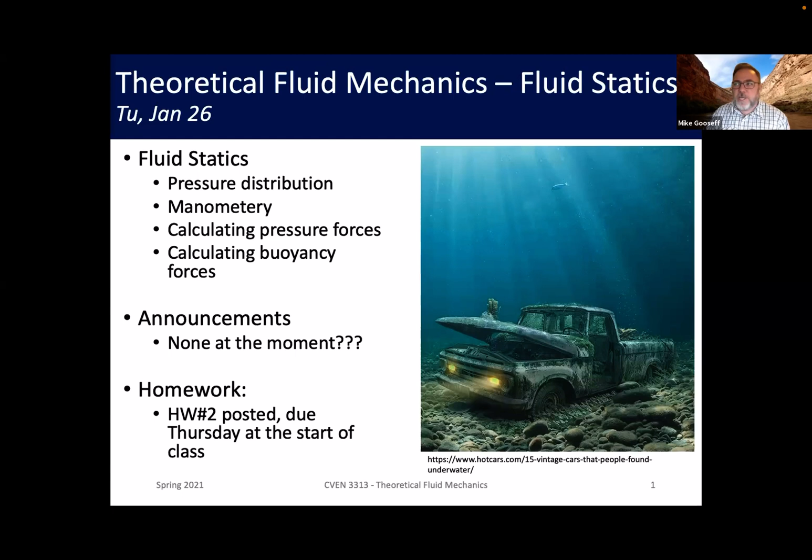So today is the 26th. We will keep talking about this for the next 2 weeks. Today and Thursday we will go through pressure distribution, and by next Tuesday we'll start talking about manometry. Next Monday's recitation will focus on problems related to the topics we go over this week. One little challenge with recitation is that we want to go over problems from concepts we've already covered.

Which hopefully makes sense to you all. We're not trying to cover new ground.

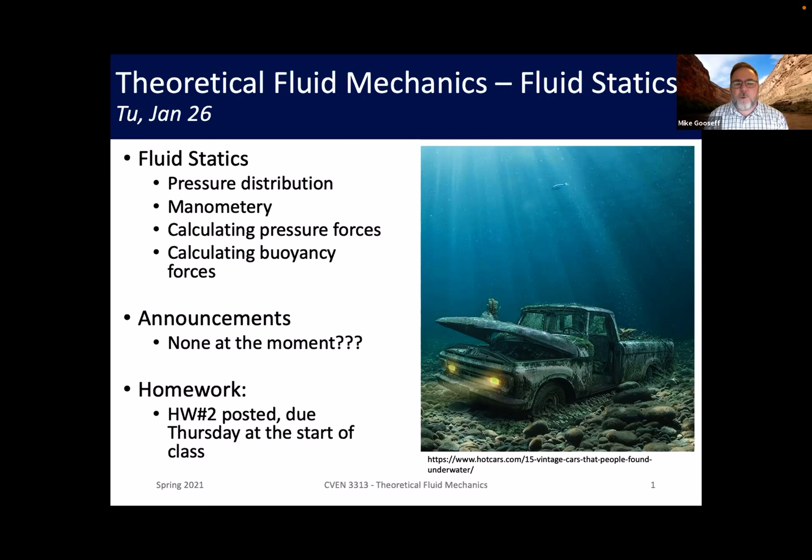Eventually we'll move towards calculating pressure forces and calculating buoyancy forces, and talking about stability, buoyancy and stability. At the moment I don't think there are any announcements, with the exception of the iClicker thing I just talked about. And as a reminder, homework 2 is posted, due Thursday at the start of class.

For specific weight, there's like professional or standard ways to write your dimensions. So for instance, for specific weight, you can't write kilonewtons per liter or per milliliter - that's not the professional or standard way to do it. It needs to be per meter cubed. Hopefully that made sense.

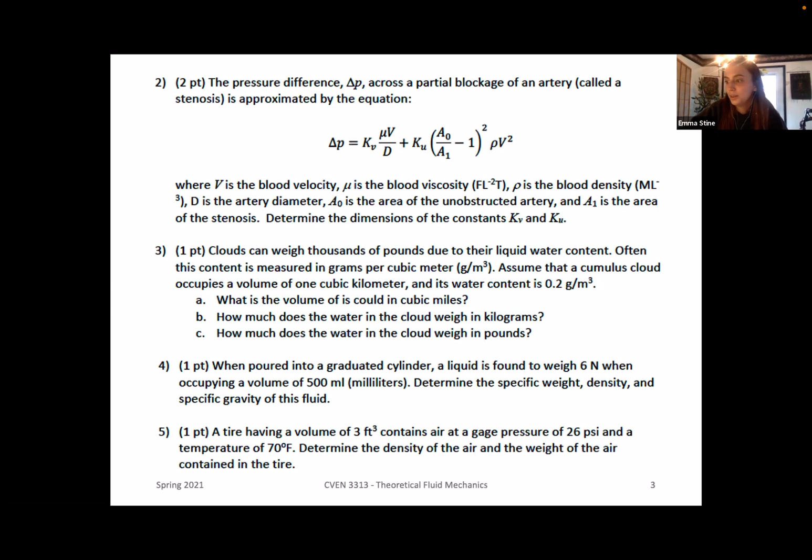One extra thing, a couple people made this mistake, is putting units for specific gravity. Make sure to remember that specific gravity is unitless. It's just relating the properties of a certain fluid to water. So make sure that you don't put units for that.

To continue on for number 5, we had a few people on number 5. In problem number 5, it gives you the gauge pressure, but you also need to add the atmospheric pressure to get the absolute pressure for this problem. So don't forget to add the 14.7 pounds per inches squared, because in this equation you want the absolute pressure and not just the gauge pressure. Related to that, that equation was in the notes - those equations are in the notes.

Related to that, when the problem gives either imperial or metric units, make sure to put the answers in that same unit. We had some people putting the weight in newtons. That's not technically wrong, but you want to keep it in the same units, because we didn't know how much the force was in newtons. You want to keep it in pounds if the problem was given in imperial.

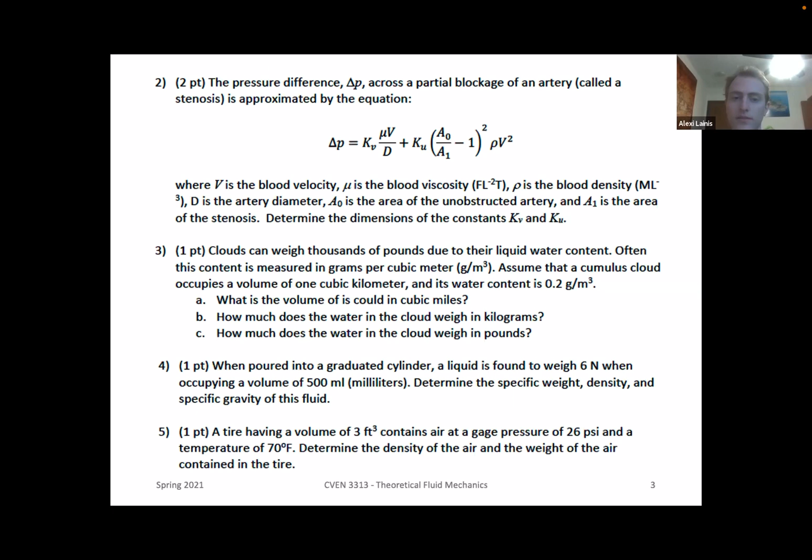The last two problems you guys did super good, and these ones were hard, but you did really well. So just make sure that you have a free body diagram for problems like these.

We didn't take points off this time because you didn't know, and most people were super neat, but maybe just try to make sure we can read it. Is there anything else, Alexi? Yeah, I think in general, for homeworks going forward, definitely watch significant figures. If you get a number with 6 decimals, don't put all 6 decimals. There's no way you know that to that certainty.

So you don't want to put that in artificially, saying you know something to that much certainty. And then also just generally be careful with units. Try to write out units at every single step of the problem. That way it'll stop you from getting errors, and make sure you don't mess up some conversion.

I don't think I have anything else on that. I'm just making a note. I wanted to add a link to the significant figures overview that I forgot to yesterday. I think I said I would during recitation, and I didn't do that.

A few questions have come through the chat. I guess a few of those would direct to me, so I've replied to those. But one other question - Elizabeth, yesterday at the end of recitation, I can't remember if I captured it in the recording or not, but she asked a question about where to find for problem 3 on homework 2, part 3. That's one of the PDF sort of problems, not the online problems.

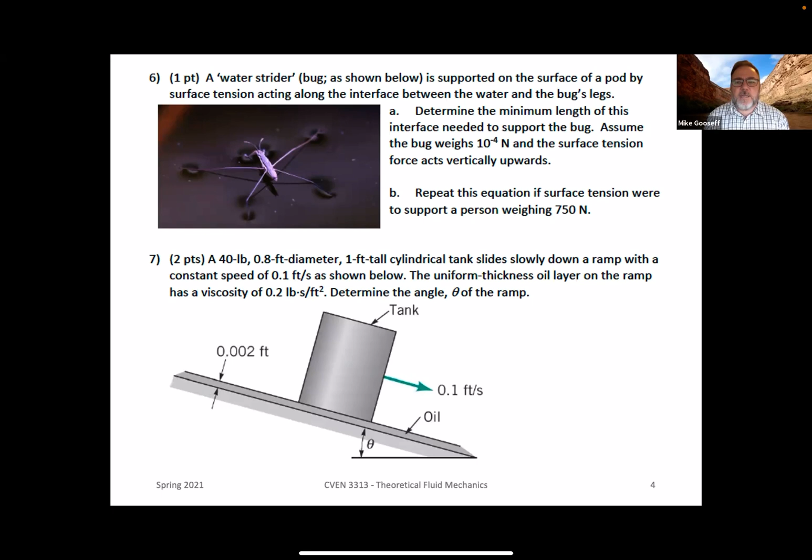Just real quick - for a couple of the questions on that first homework, I didn't do sig figs because the question was given with a single figure, and I figured that was a pretty significant error. Do you want us to be rigid on that?

Yeah, from going forward, you'll need to use significant figures. So I'll provide a link in Canvas to the material we have in the electronic book, or you can go find it yourself. It's one of the appendices essentially, but it's a pretty nice overview to remind you what happens with significant figures when you have 1, 2, or 3 in different numbers, and then you add, multiply, divide, whatever you do to them. How do you move forward with those? So thanks, Julie, that's reasonable up to this point, and going forward we'll try to enforce this a bit more and get you guys used to using those.

Just quickly remember that when you go through the problem, don't round as you go. Once you get the final answer, you can write out that answer with lots more digits, and then write it again with the correct number of significant figures.

As a reminder, we're not posting solutions right after we grade. We're going to post the solutions to all the homeworks the Friday before each exam, from the last batch of homeworks. The reason we're doing that is in case anybody gets sick and needs to turn in something late, it gives us the opportunity to not have the solutions out there so they can complete the assignment. So it's just a little bit of a way of providing some buffer for us.

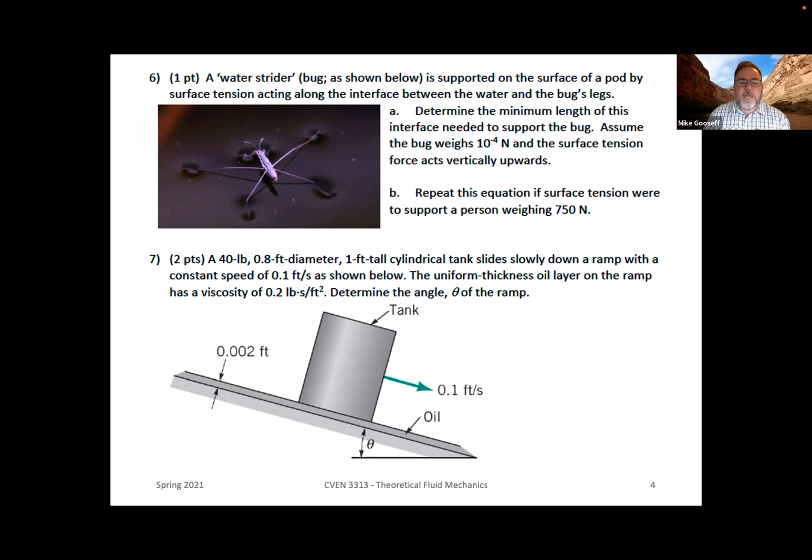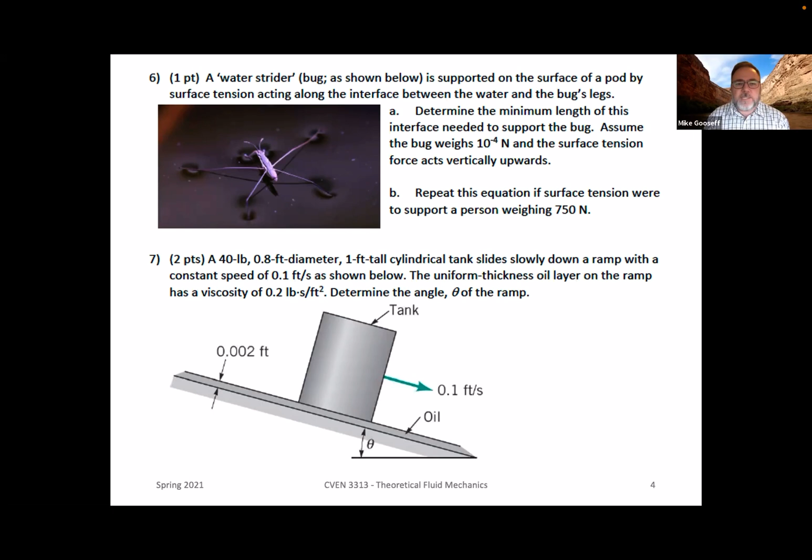So you will see those, we will post those - it just won't happen until a couple of weeks here. You'll have them in plenty of time to study for the exam, but we wanted to provide this in case we have to deal with different folks getting sick through the semester. Thanks, Emma and Alexi, appreciate that. I don't know that we'll do this for every homework, but part of our point here was just to make sure we're all developing good habits as we work through our homeworks for the rest of the semester.

Right, so we're moving into a new unit here, a new module. I've got a lot of underwater images here, because when we go underwater, we may or may not feel it if we're just in a swimming pool, but if you are a scuba diver, you will start to experience pressures at depth that are the consequence of overlying water.

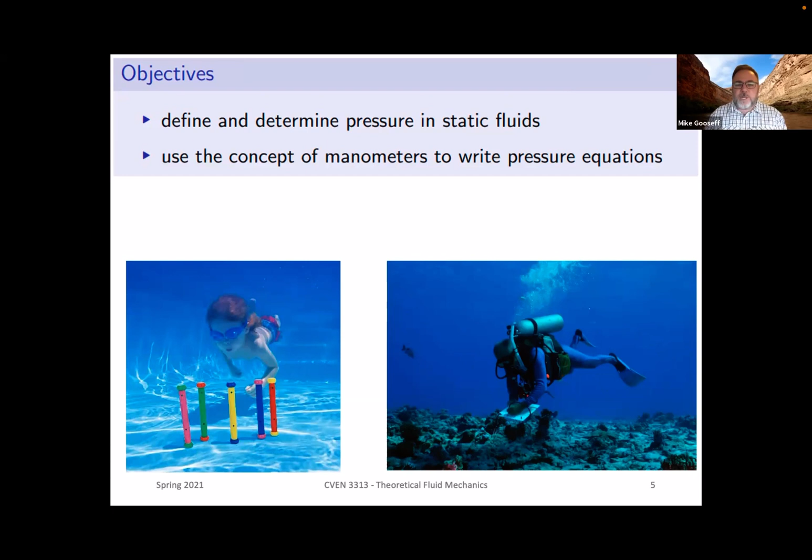Our objectives here are to define and determine pressure in static fluids and pressure distributions. We're going to use the concept of manometers to write pressure equations so we can work through complicated systems to figure out how pressures vary. Manometers are simple ways of reading pressures in pressurized systems, and we'll talk about how to make use of those. We will start to calculate pressure forces on submerged surfaces, and over the next 2 weeks or so, we'll also calculate buoyancy forces and discuss stability.

So what happens when we are or are not stable? That's really for something in particular that is partially submerged, so we think about a barge, a boat, a ship, things like that, so we can calculate the stability criteria.

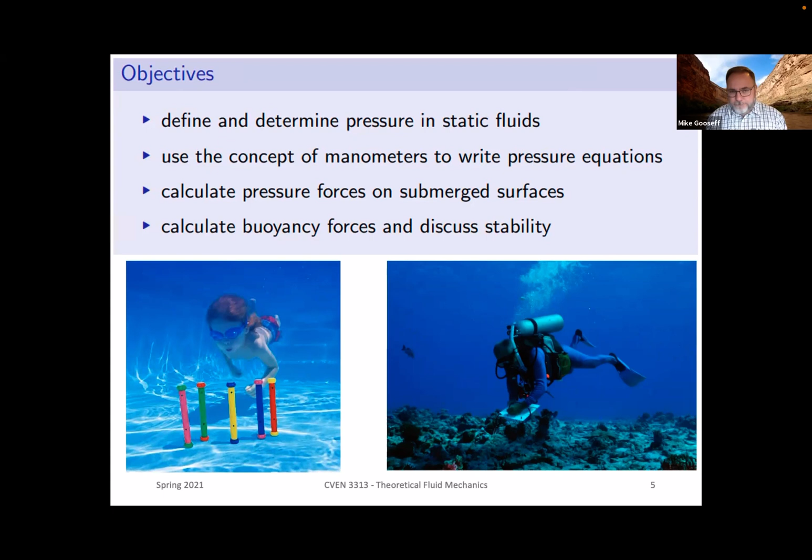As we see from these two pictures here, there are lots of complex shapes that occur underwater, right? We're going to start with very simple geometries to derive our equations or relationships, but recognize that these apply even to complex shapes, like a human with a tank on their back and flippers and so forth. Whatever we can submerge, we should be able to calculate a pressure distribution on, if we can put it in a fluid, and in large part, I'm thinking carefully about the context of underwater.

And this, I thought, was just a good example of that, a place where we have a fairly horizontal bottom to this, and then this really nice drop off here with this ledge.

So pressure is a normal force per unit area at a point in a fluid, okay? You may be used to hearing things like when we've talked about the ideal gas law, or if you've had to put air in your tire, you say PSI all the time, but ultimately PSI stands for pounds per square inch. The square inch is an area and pounds is the force. In SI units, that might be pascals, newtons per square meter. Those are the typical unit combinations that we have for pressures. So a pressure should always be a force per unit area at a particular point in the fluid.

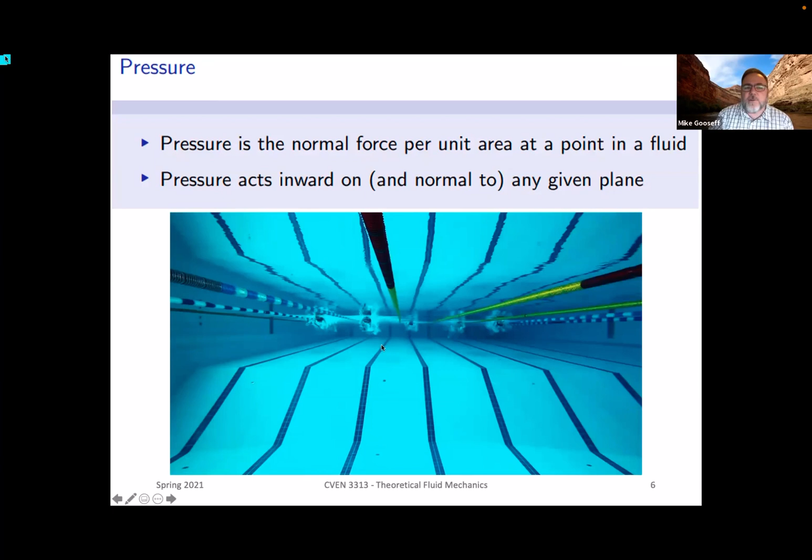Pressure acts inward on and normal to any given plane, which means we have pressure acting on every location, every square millimeter of the bottom of this pool, which probably doesn't surprise you. What we will eventually talk about is how that pressure varies as you move to different places, either in the fluid column, in the water column, moving up and down. These swimmers are all swimming at the surface, but if you were to dive in, how the pressure variation changes as you go through different depths, and how it changes on the bottom of the pool based on the elevation you're at. In other words, it might be different in the shallow location than in the deep location on the bottom of this pool.

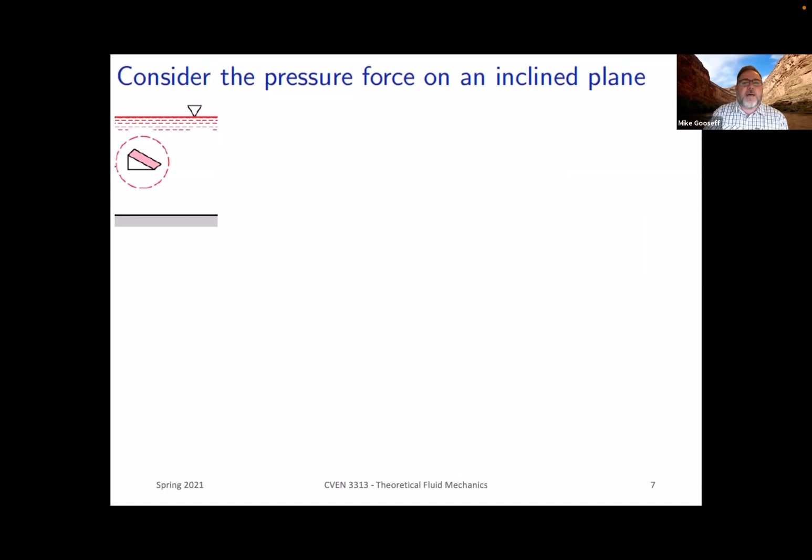Okay, so let's start with considering a pressure force on an inclined plane, and this is this inclined plane that we're showing on the left-hand side being submerged, okay, in, let's say, a pool or a lake for that matter. One thing I want to point out, if you're not familiar with this, this is our notation.

This upside down triangle is our notation to identify a free surface, meaning the surface of the liquid where it interacts with the gas overlying. In most cases, that's air, but you could have a closed system that might have some different gas than air above a liquid. But in any event, we're going to start with a very simple situation here with this wedge.

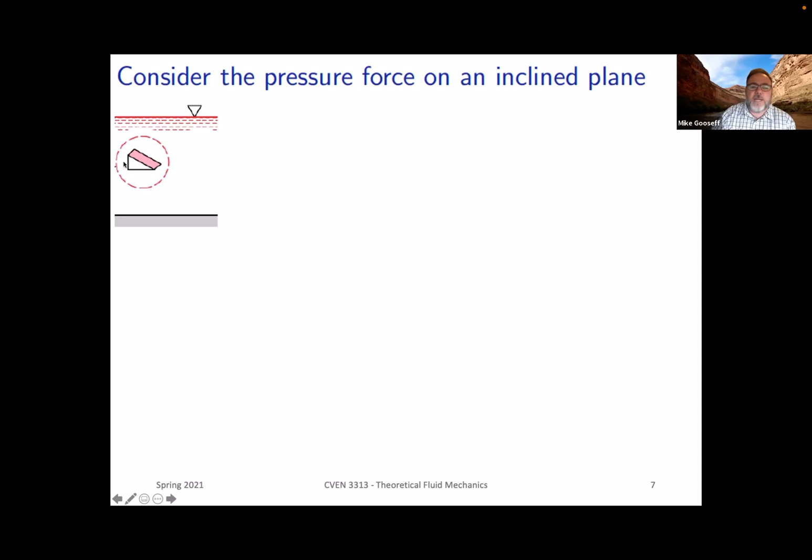All right, so let's zoom in on this wedge a little bit. This looks complex, but it's going to get more complicated. So let's talk our way through it, and then we'll start to talk about why we're using a wedge here.

So for starters, you can see that we've provided a Z direction, an X direction, and a Y direction. X and Y are kind of in the same horizontal plane, and Z is vertical. And so the bottom of this wedge is in the XY plane, and you can see that the top surface then is sloping from this Z location down to Z equals 0, essentially. So this is some length here, at Z equals 0. It has some X dimension to it, but not a Y here.

In general, we're just going to give some dimensions here. The height of the left-hand side of this wedge is delta Z, just using some generic notation here. The reason is that we can start to generate some simple formulas that allow us to look at how these things relate to each other. So the first is delta Z is the height of the wedge on the left-hand side, the tallest part. It has some length in the Y dimension, delta Y, going along this horizontal here. It has some width, we might say, delta X. And then it has this hypotenuse length here, the length of this ramp or hypotenuse of a triangle. This surface has some length, delta S.

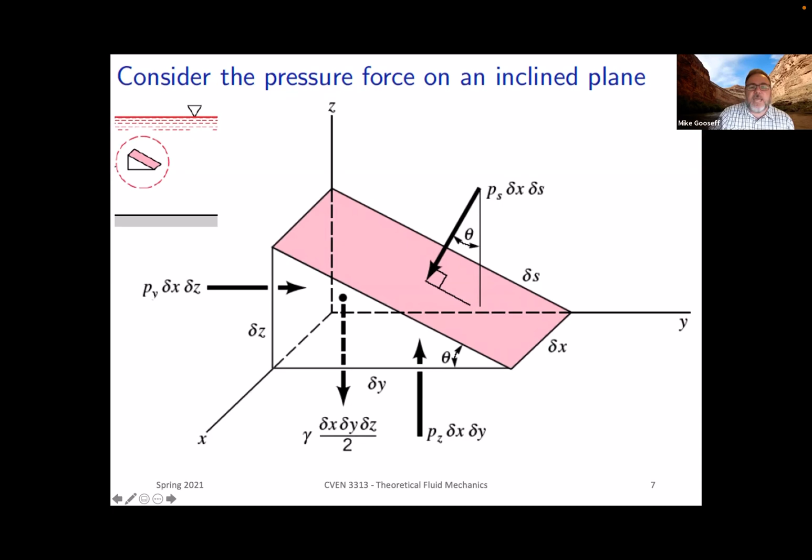Now we're going to do the same thing on these other forces. P sub Z is this vertical one coming up from the bottom, and it acts on the bottom, which has an area of delta Y times delta X. Delta X, delta Y is the area, multiplied by the pressure P sub Z gives us this force acting on the bottom. Then, skipping that one for a second, Py is acting on this left-hand side, Py times the area acting there.

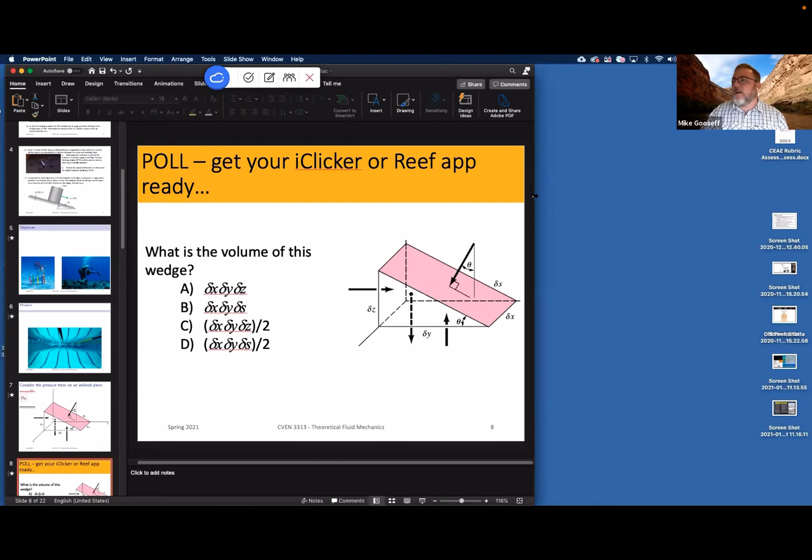The question I want you to wrestle with here is, what is the volume of the wedge? Is it A, delta X, delta Y, delta Z? Is it delta X, delta Y, delta S? Is it delta X, delta Y, delta Z divided by 2? Or is it D, delta X, delta Y, delta S divided by 2? Let me get going here, multiple choice, and we'll look at the results as they come in.

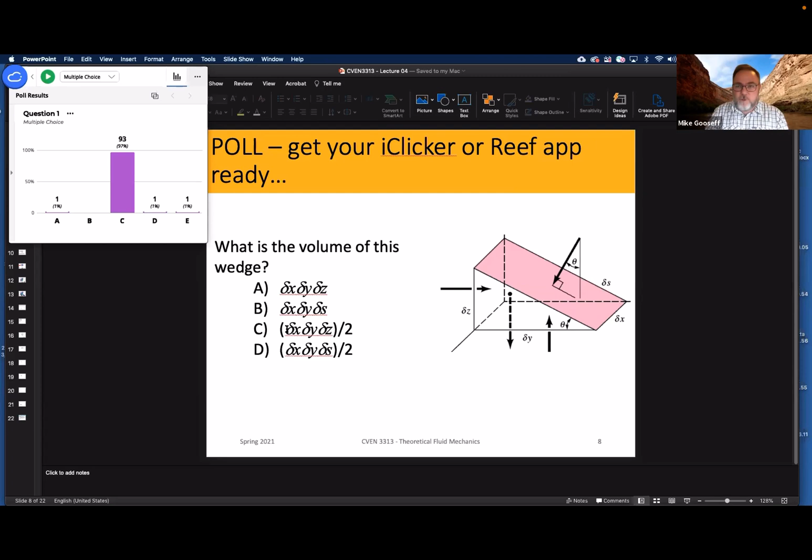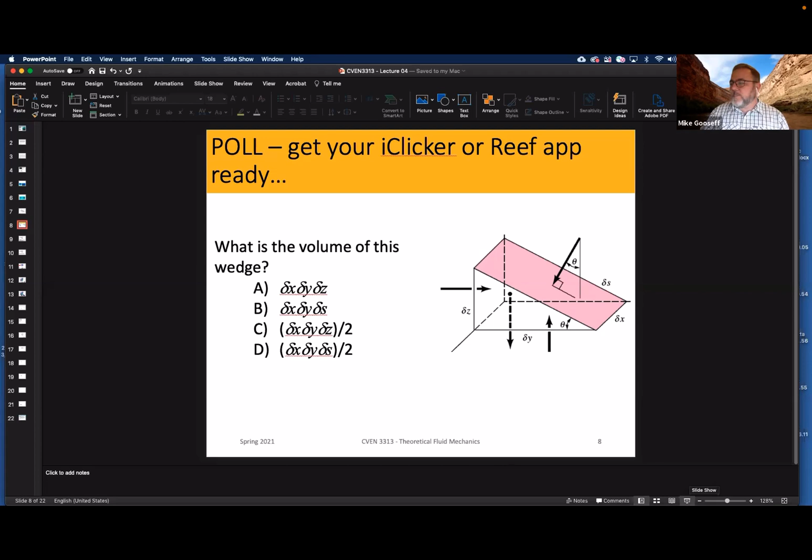The next thing we're going to do is work through the force balances acting from each of these pressures and the weight, and look at how they all balance each other to come up with a few fundamental pieces of information for us to use. When we do that, we will need the volume, so I'm not going back to recalculate it, we've got it here, which is part of the reason I wanted to do it this way. Let's move on.

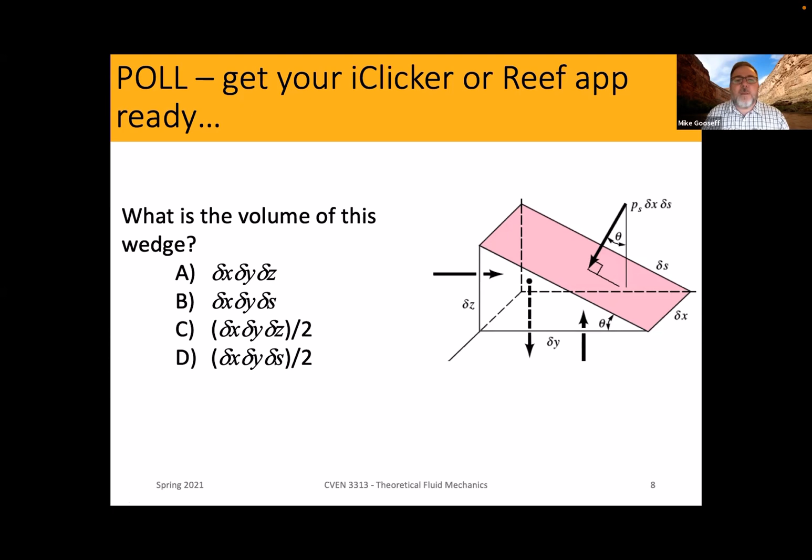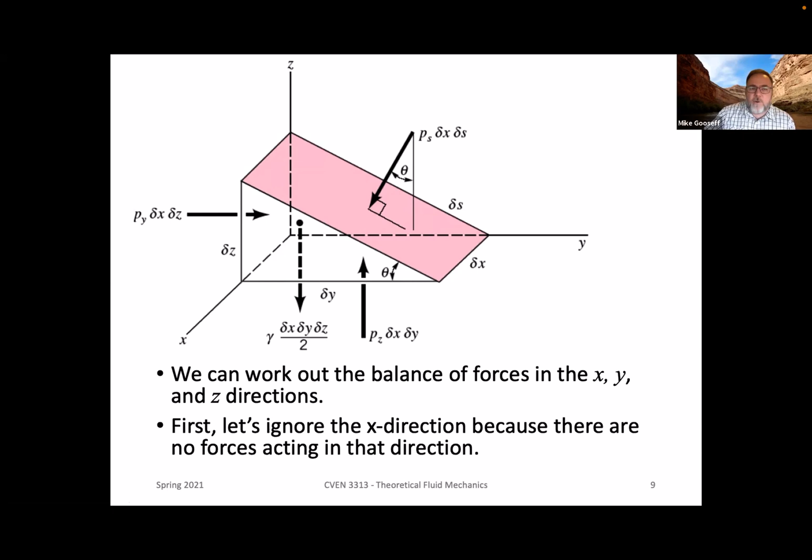And so this gives us the weight force acting in the vertical downward z direction. We can work out the force balances in the x, y, and z directions. First, let's ignore the x direction. We haven't drawn x pressures here, or the forces related to those pressures. The reason is that if I put one in meeting this location, and there was another one coming from the other side, they're both acting on exactly the same areas, so they would cancel each other out.

Part of the reason we're ignoring x is that in this case, because we have the exact same area in the yz plane for both sides of this wedge, those pressure forces are going to be equal, because they're at the same elevation and act on exactly the same areas, so they cancel each other out. So we're just going to work in the y and z directions for our force balance analysis.

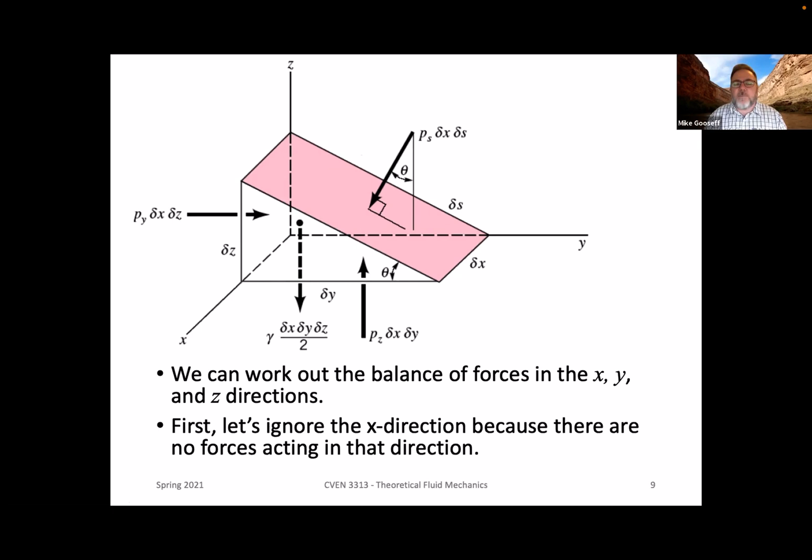Because the fluid is static, and the block is static as well, we expect that the sum of the forces in the y direction equals 0, and the sum of the forces in the z direction also equals 0. Note that, one of the things I didn't mention before, our angle for our inclined plane here has value theta.

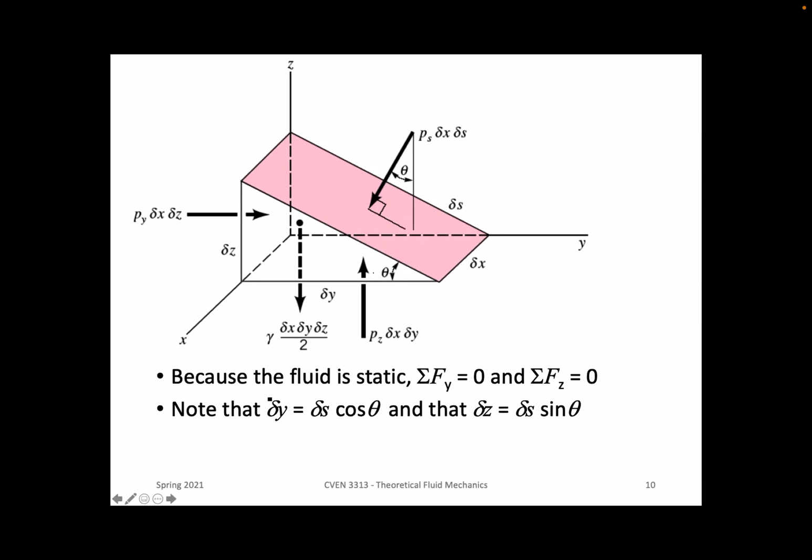So if we want to represent delta y, which is this length here, as a function of delta s, we can say delta s times the cosine of theta gives us delta y. Similarly, delta z over here is equal to delta s times the sine of theta. I'm providing that to you for the moment. We're going to use that in some substitutions in a moment, but I thought it would be easiest to provide those up front, so we can pull them into our analysis without having to diverge from the force part to deal with geometry.

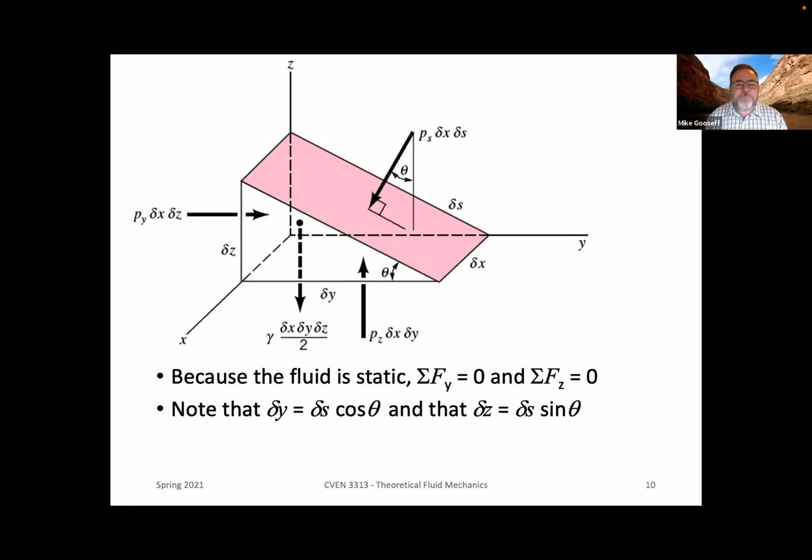All right, so let's start with the sum of the forces in the y direction. First, let's start with this thing acting in the positive y direction. We have a pressure force, Py, whatever that pressure is that's acting on that face, multiplied by the area of that face, delta z tall by delta x wide.

Then secondly, we have some y component of this force that's acting normal to the face of our wedge here. It's going to have both a z and a y component. So we've got some piece of that as well. It's not fair to say it's Ps times delta x delta s. We're going to have to add like a cosine or a sine to that, to just get the component we want.

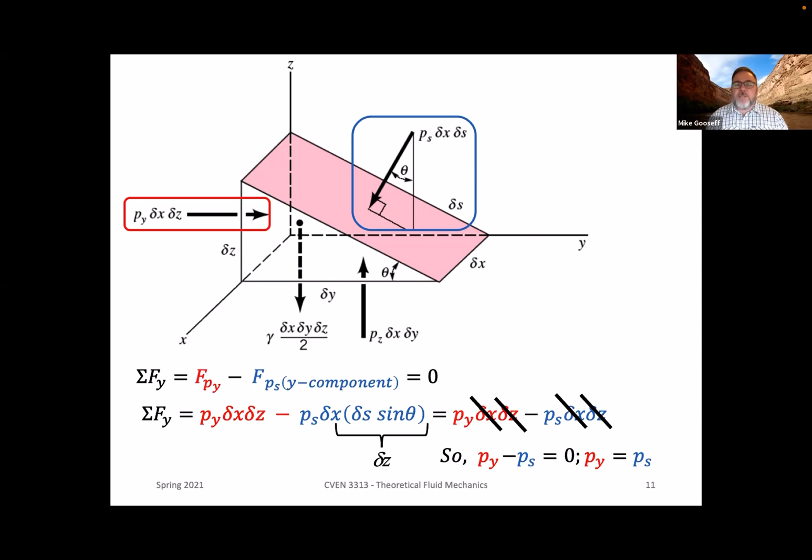Well, what will we learn if we do this in the Z direction as well? Let's go back to scratch here for a second and look at the sum of the forces in the Z, or vertical, direction.

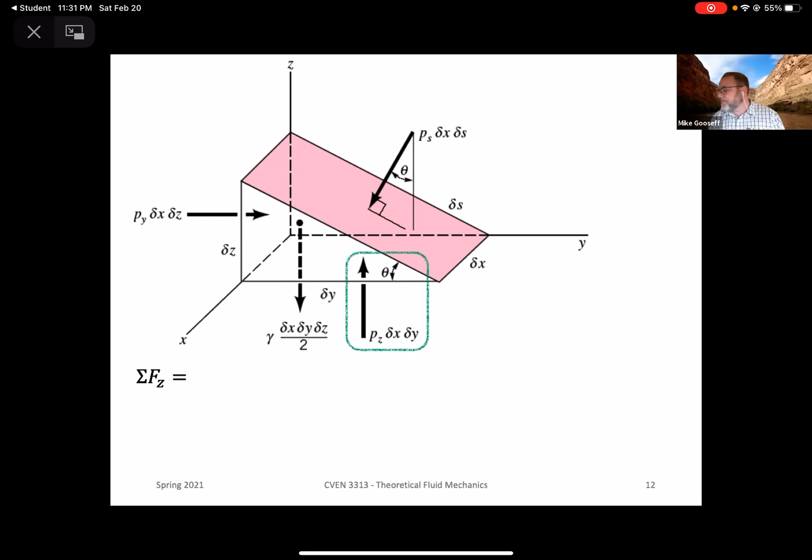We're going to start with our upward force acting on the bottom of the wedge here, and you can see that that is a force PZ times delta X delta Y. We're going to give that a green color. We're going to have the blue one again be our PS.

Right now, we just need the vertical component. Before we were using the horizontal, or the Y, component. Now we're going to look at the vertical, or Z, component of this force acting there. And then the last thing we have, I decided to use purple for this, so we didn't reuse red, but now we've got purple for the weight force.

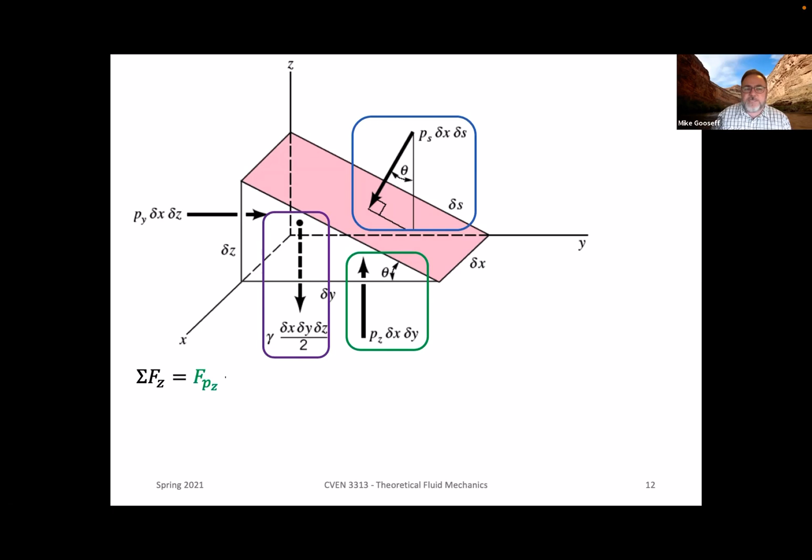So let's again set up our force balance equation with font colors that match these indications that I've provided. The sum of the force in the z direction will be equal to the force that comes from P sub z, the pressure P sub z acting on the bottom of our wedge. That's acting in the upward direction, so it's positive.

Then we have some negative component of the force related to this P sub s, right? So some z component would be negative. And then we have weight also acting in the negative direction, okay? So one up, two down, right? And somehow all of these have to balance for this sum of forces to be 0.

All right, so let's expand these out and write them down in terms of the pressures, right? That's where we found some utility when we were evaluating the sum of the forces in the y direction. Let's see if we can do it again here in the z direction, see if we learn something different. Spoiler alert, we will learn something different.

So P sub z times delta x times delta y is the force related to this pressure acting on the bottom of our wedge, okay? So there's that term, we shouldn't be too concerned about that, that should look familiar. And then the P sub s term component that we want is basically P sub s multiplied over this area, delta x times delta s. But now we multiply by cosine theta, so it is the cosine component that we want to give us the vertical component, right?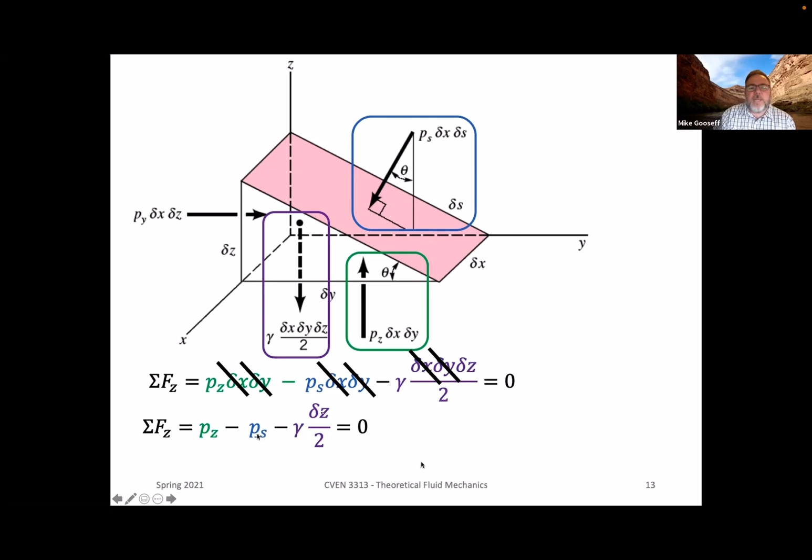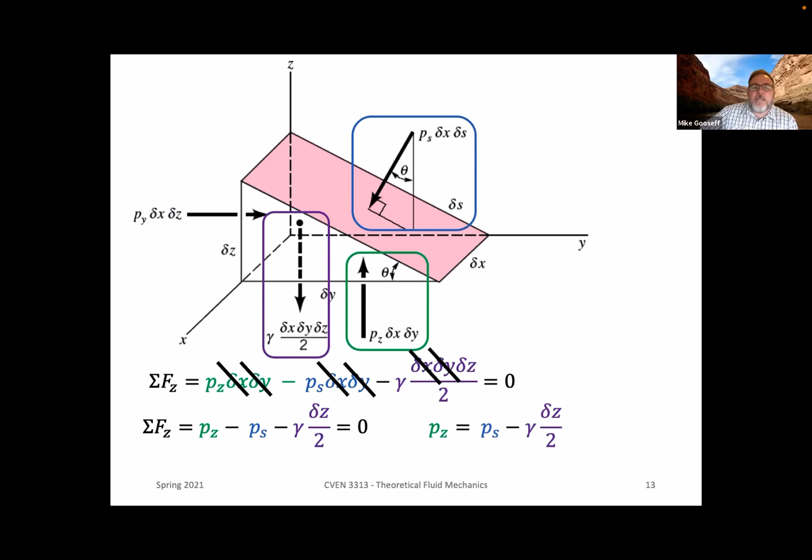That balance looks like this: the pressure at z minus the pressure at s along the slope minus gamma times delta z over 2 equals 0. What does that mean exactly? Let's rearrange this a little bit and see if this helps. P sub z, the vertical upward pressure acting on the bottom of our block, is equal to P sub s minus gamma delta z over 2. And if that's the case, one thing I want to note is that there's a limit.

If delta z gets really, really small, isn't it a plus? Oh, I think you're right. If I put this on the left hand, yep, sorry, this should have been a plus. Thank you, wait, I can fix this, sort of. I have the ability to annotate, let's see if I can do that real quick. So this, yeah, apologies, this should be a plus right here. So that was bugging me as I presented it, but I'm glad you guys caught it. So the P sub z goes to the opposite side. What that would mean is that all three of those terms would be negative, so when we multiply through by negative 1 to get this to be positive, this term should have been positive as well. So thanks for that, I do need to clear that notation to move on.

Oh, before I do that though, let me just cover this point. As delta z becomes smaller and smaller, eventually this term will basically go away, and P sub z will also be equal to P sub s. So we do have an extra term here, but as we get infinitesimally smaller, as delta z approaches 0, P sub z approaches P sub s. They become equal to each other.

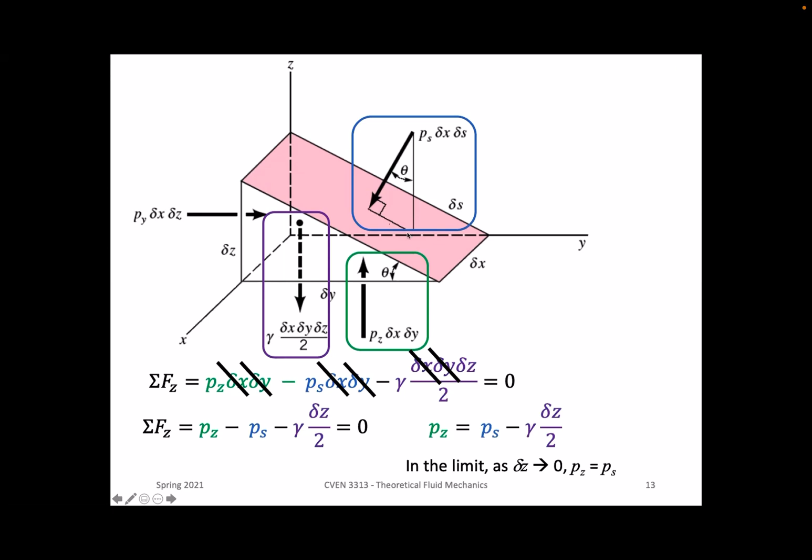Professor, I have a question about the slide before. For the arrow on the pink rectangle, isn't the x and y component, like the bottom one, should be parallel to the y plane? Isn't the arrow... this part? Yes, so this arrow has to be normal to this plane, to the sloped plane. And what we want, we need to decompose that into two pieces, right? So there should be a vertical part and a horizontal part to it. So the y part on the bottom shouldn't be parallel to the... Oh, this is not indicating a component of the force, this is just indicating that it's normal, this is just showing what the angle is compared to the plane. So yeah, these aren't meant to be component forces. Okay, thanks, thank you.

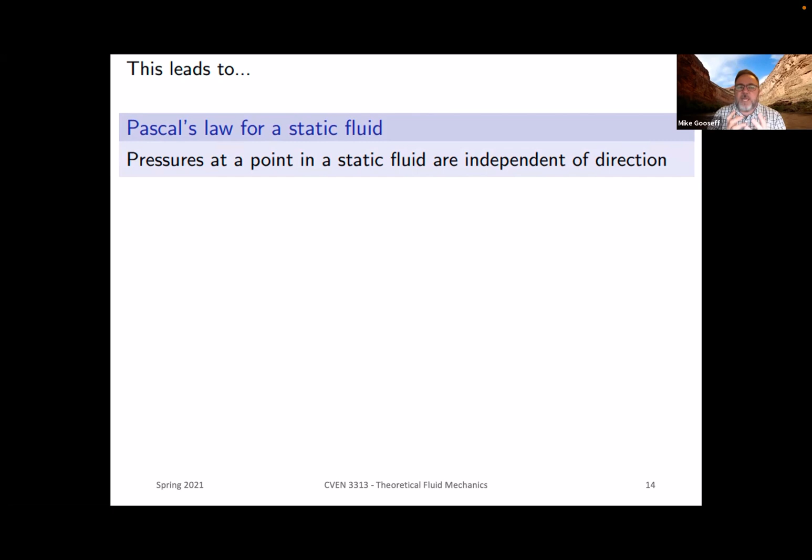So that whole exercise leads us to Pascal's law for a static fluid, which says pressures at a point in a static fluid are independent of direction, meaning that when you take your body and jump into a swimming pool and get down to some level, and lay out horizontally if you can, assuming we've all got some thickness to us, some height even if you're laying out flat, but let's just say we're infinitesimally small, all of the pressure acting on us at that location is equal. So pressures at a point in a static fluid are independent of direction, they are all occurring with the same magnitude in all directions. But I should caution by saying all directions, what I really mean is all directions inward on a point of interest, or a plane of interest, or a body of interest in some way.

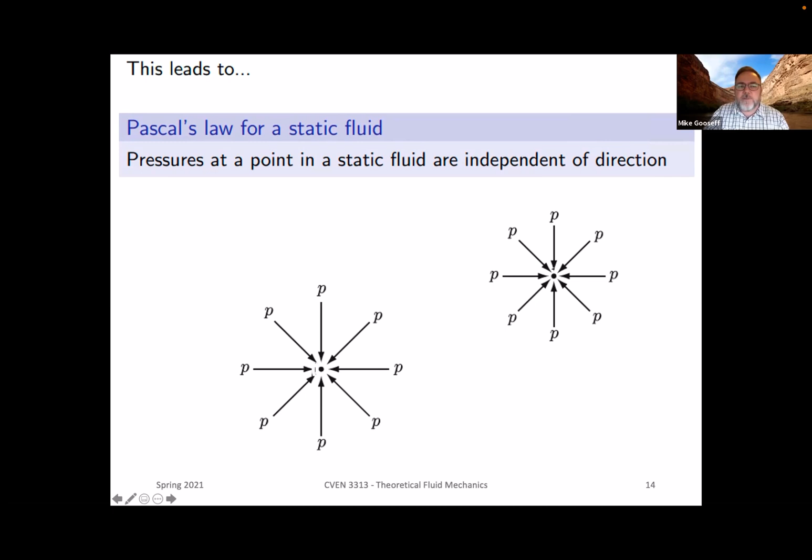So these are two drawings, and perhaps they would be better drawn with all of these as P2 acting on this point number 2, which is at a different elevation than all of these P1s, perhaps acting on this location 1, something like that. But the idea is that these P's don't have to be the same for both places, but within each, the arrows that are all pointing to the same point have the same pressure. Okay, so all these P's are the same, and all of these P's are the same for this particular location. All right, now that's going to be helpful to us.

Pressures can vary from point to point, and in fact, it will sort of depend mostly on whether we go up or down. I'll give that away as a bit of a teaser for what we're about to talk about next. But when you're at a single point, all pressures, hydrostatic pressures acting on that particular point are the same, right?

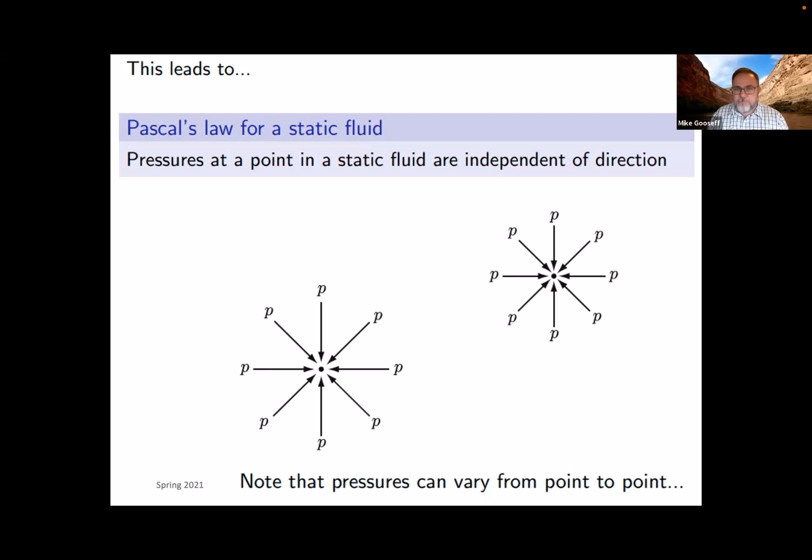Okay, so now let's get into something we call hydrostatic pressure distribution. So we've been building to this, and we're going to do something similar to what we did a moment ago, but try to formalize this a little bit. All right, let's take a cube.

A cube will have a delta y length, a delta x length, a delta z length. Now, I've called it a cube, which suggests that all three of these are the same value, all equal to each other. They don't have to be. We can have some rectangular sort of shape if we wanted, but it's a three-dimensional rectangular object.

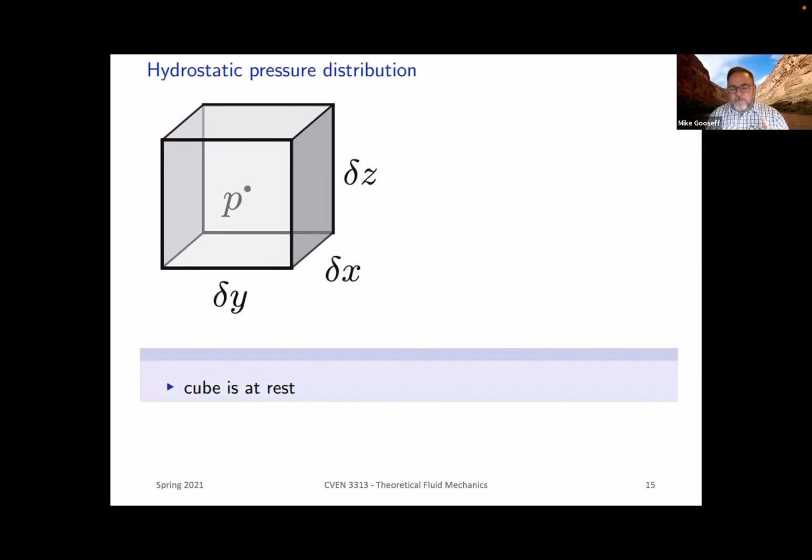All right, first of all, we're going to assume that the cube is at rest. Again, hydrostatic is the key here. Secondly, we're going to say that there are pressures acting inwards on all 6 faces.

Now, one thing to note is that the delta x here is the same as the delta x here, as here, as here. And delta y is the same here and here as it is on the back side as well, this back face, there and there. Those are all delta y's, regardless of the value. And delta z is the same for vertices 1, 2, 3, 4 as well. Okay, so this will help us in a moment as we work through some math, but I just wanted to take a moment to note that.

And then finally, as you would expect, the weight of the cube is acting downwards, right? Vertically down, so in the downward z direction.

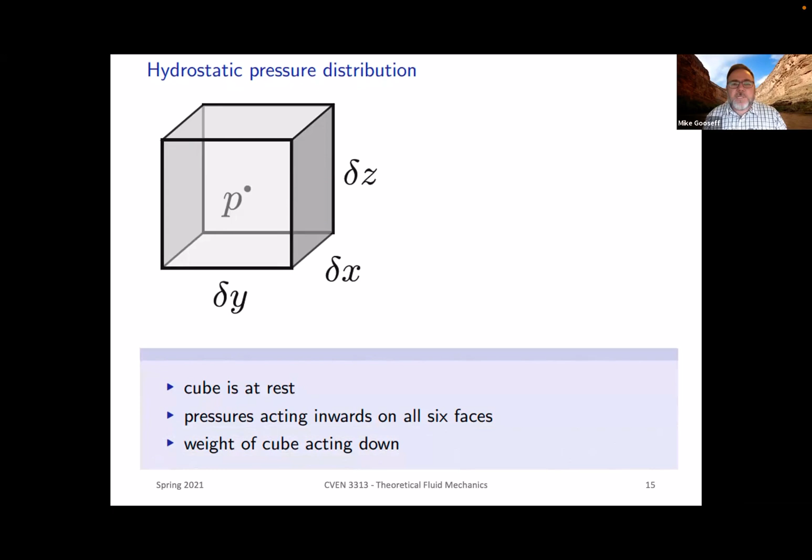All right, so let's consider the forces acting in the y direction on our cube here. And it's fine if we just assume that delta z, delta y, and delta x are all the same value. That's totally fine. So we've said that the sum of the forces in the y is equal to 0. We have a static system, so that shouldn't be a surprise.

The magnitude of this force acting in the positive y direction is something we're going to call P minus del P del y times del y over 2, times delta x delta z. Okay, let's work our way through this. Delta x delta z is, of course, the area of this plane, right, on that left-hand side. And P is some pressure value.

What we're doing is penalizing that. Well, P is this value in the middle, right? And then what we're going to do is subtract whatever the pressure change is in the y direction multiplied by delta y over 2. So I think I said dy earlier — this should be del P del y times delta y over 2, where delta y, remember, is this length here. So this force acting in the positive y direction is also accounting for how pressure might be changing in the y direction.

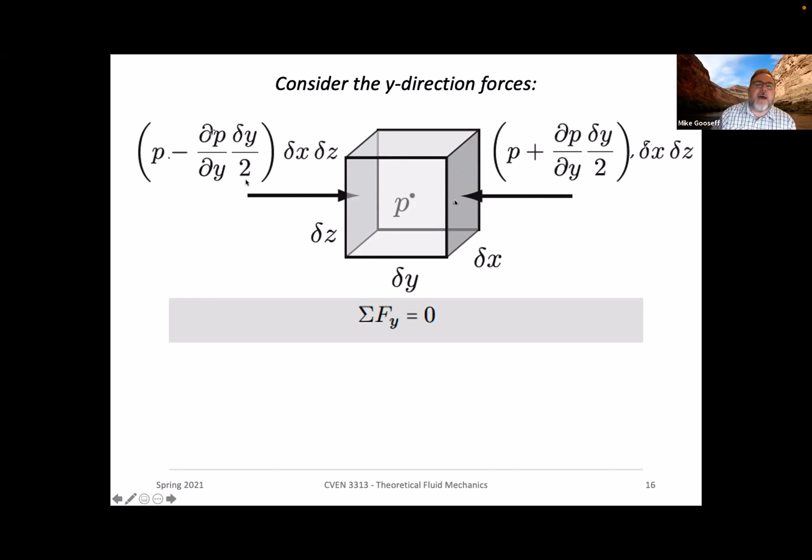So in this case, we said P minus whatever our pressure gradient is times some distance to get over to that location, if we had a pressure gradient in the y direction. Now, as you can expect, when we write these out, we're going to say that the force acting from the left minus the force acting from the right, which is in the negative y direction, is going to be equal to 0.

So all we've done is now formally put these into an equation to fill out this sum of the forces in the y is equal to 0. And when we take the next step, we basically find the P's will cancel out, right? Plus P, minus P. We have delta x, delta z, delta x, delta z. Those will cancel.

What we end up with is that del P del y, the pressure change in the y direction, is equal to 0. Now, you may have trusted me if I said that the change of pressure in the y direction is equal to 0, but we needed to prove it. And part of the reason for that is that we're going to see how this is different in another direction. So I'm giving that away a little bit. But let's just take a more practical approach to this.

If I go down to a certain elevation in a pool - let's say that I don't know if the rec center on campus is open and we could go swim in the Ralphie pool, but let's say we could, and we go down 3 feet. And I can kind of hold myself horizontal, laid out at 3 feet of depth.

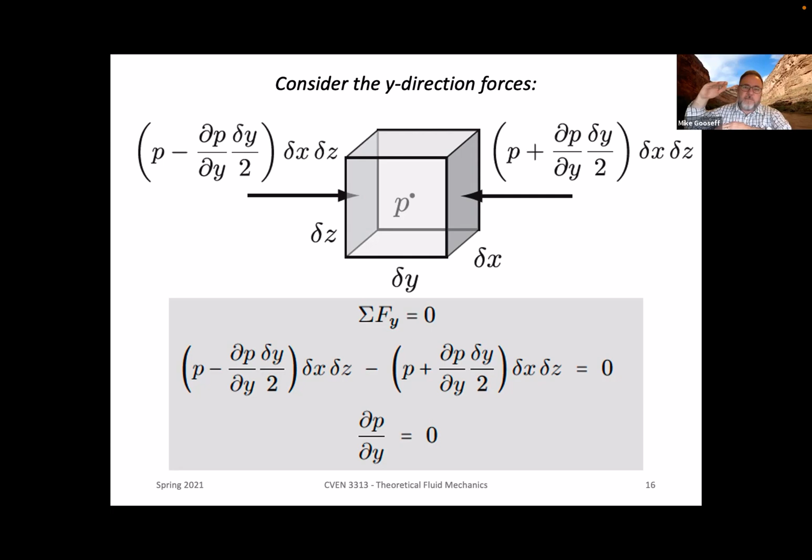So it's 3 feet of water above me. No matter where on my body I try to make a measurement, all parts of the top of my body are 3 feet from the top, meaning that there's no pressure distribution. When we move horizontally in a fluid, we should have no pressure distribution as long as the overlying fluid or liquid depth doesn't change, okay?

And it turns out this is the same for the x direction. So I'm going to skip the step of going through this whole thing for the x, just note that the same thing would be true if we substituted an x for a y and thought about what was happening sort of into the screen and out of the screen on this plane and this back plane compared to y. So same thing would happen. But there's something different going on for z. So let's spend a moment thinking about that.

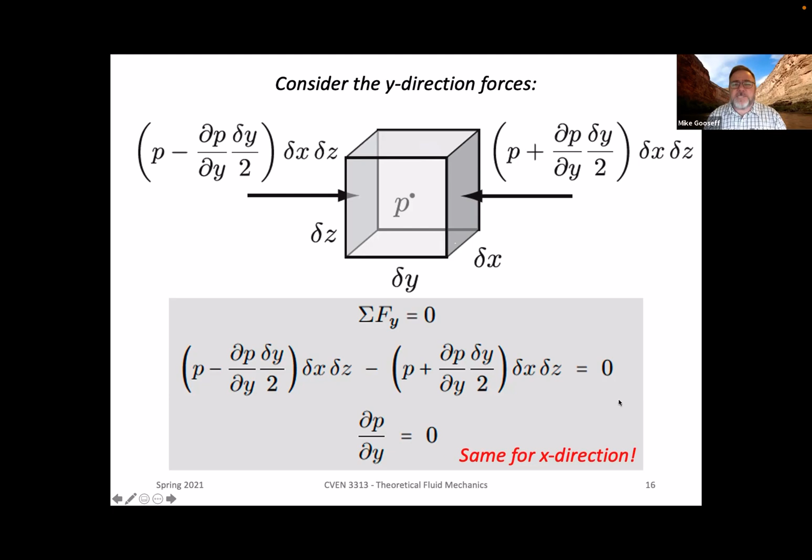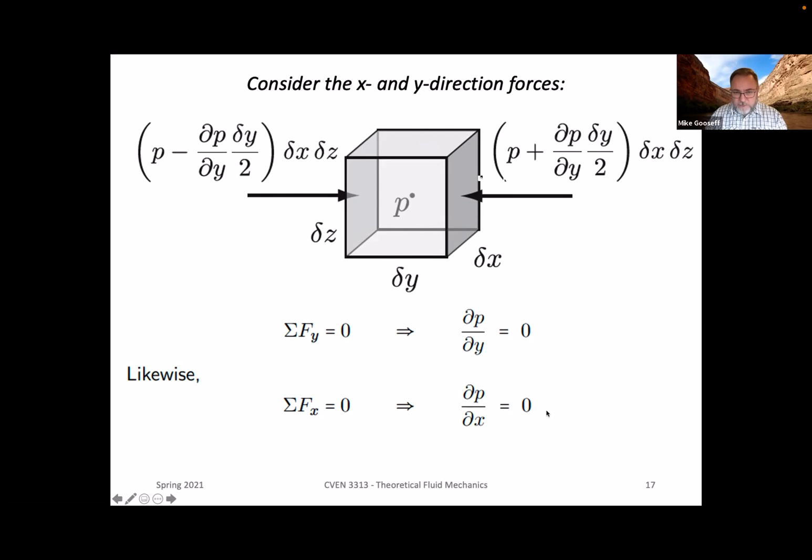So here's our summary: when we go through this for y, or if we went through it for x, the sum of the forces in the y direction equaling 0 yields that there is no pressure gradient in the y direction. Similarly, we can go through the exercise for x and find that there's no pressure gradient in the x direction either. Okay, I think we'll probably wrap up with this concept here. All right, so let's consider what happens in the z direction.

Now, unlike x and y, gravity works in the z direction, and that's our biggest difference here, okay? So we have our cube again. We're going to assume delta y, delta x, and delta z are all the same value. So we have our cube, and pressure is noted at this value right in the middle of our cube. So P is some pressure at that value, right?

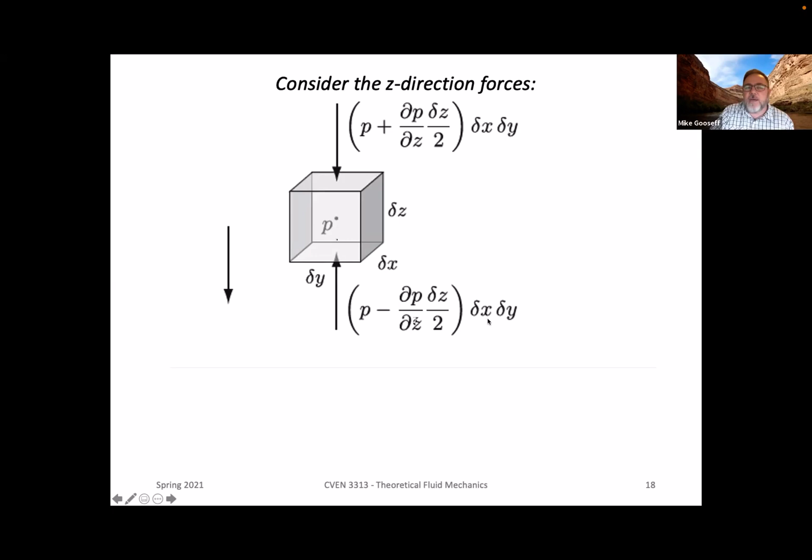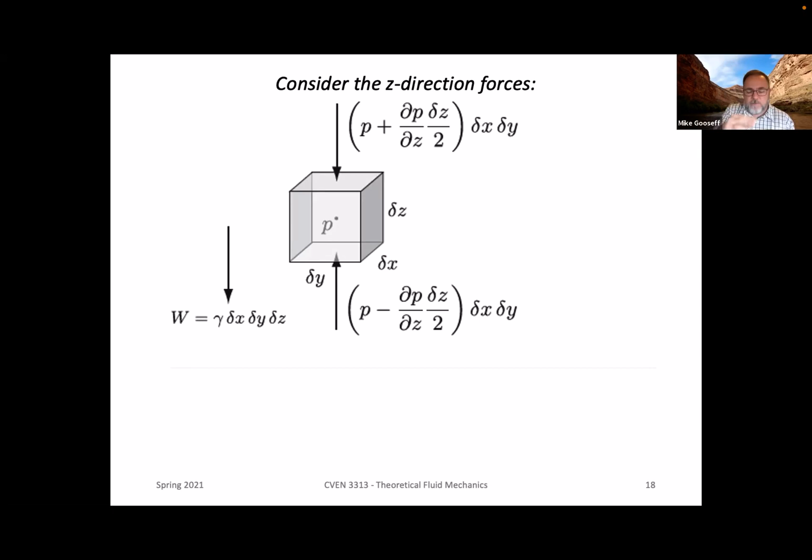All right, and we've left this off to the side, but of course the weight - I just didn't want to have it right on top of the other arrow here that's acting upwards. The weight, of course, is also acting downward, and it has a value of delta X, delta Y, delta Z, so the 3 dimensions, because this is cubic, multiplied by the specific weight - the weight times volume.

So that gives weight per volume multiplied by the volume, giving us the weight acting in the negative direction. Again, the sum of forces in the Z direction equals 0, and we can put these three together. Now we have this pressure force acting on top, acting in the negative direction, and the one acting upward is this positive term, and then we subtract the weight as well.

And it is because of that gravitational weight that if we simplify this all out, we end up with del P del Z equals negative gamma. What this means is that the change in pressure as we increase our depth, as Z gets more negative, is equal to the magnitude gamma. Gamma, remember, is rho times G.

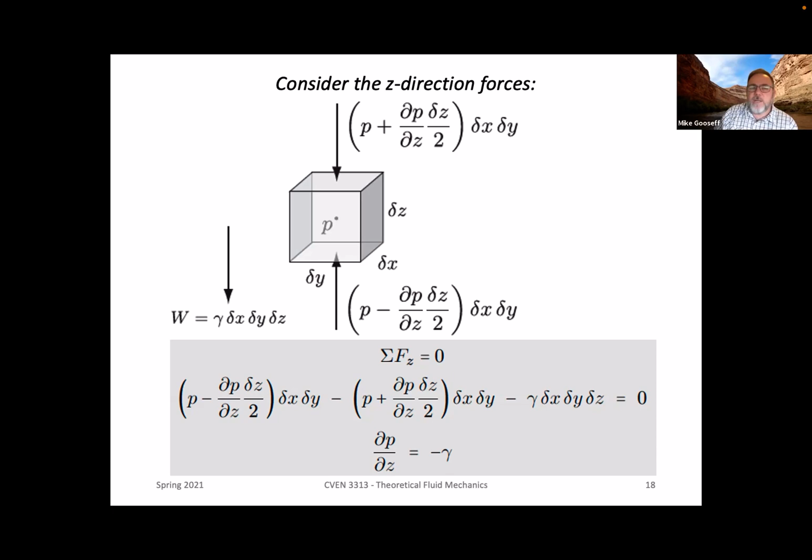It will be dependent on the density, in this case, of our fluid. Let's talk about it being a cube of fluid rather than a cube in fluid. That negative gamma is the specific weight of water, so it's the density of water multiplied by the gravitational acceleration, rho times g. This is a very simple, easy thing to think about, and we can conceptualize it.

We're going to start to make use of this as we think about how forces are distributed through depth. Similar to what we said a few slides ago when we considered the x and y direction, now the sum of the forces in the z direction equals 0. That yields del P del Z, or the change in pressure with depth, is minus gamma, which is the specific weight of whatever your fluid is.

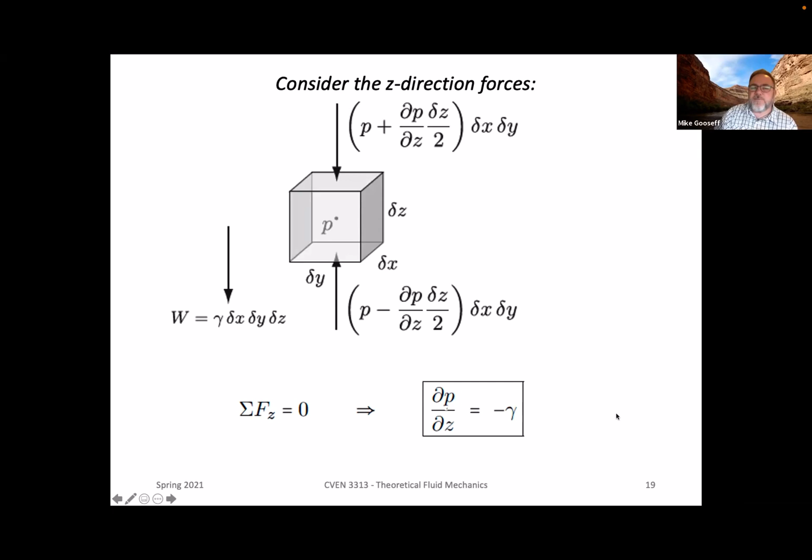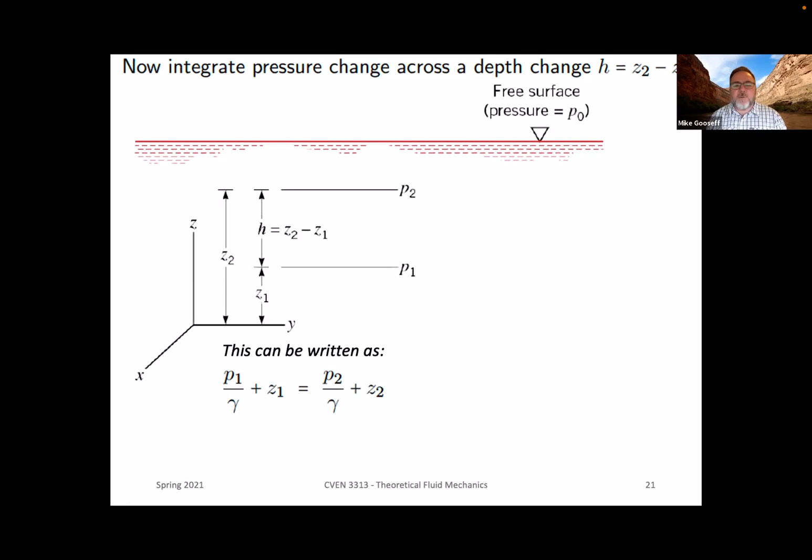What this says then is that an offset in Z is made up by a change in P, or really P over gamma. And so this sum is equal to this sum. So when we go from Z1 to Z2, we are increasing Z, right? Z2 is some value greater than Z1. That means that P1 must be a higher value than P2 because these sums have to work out. They have to be equal to each other.

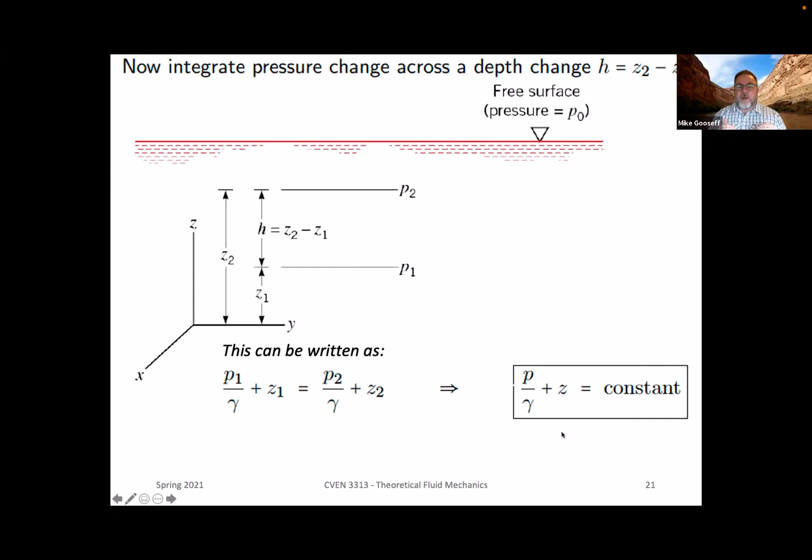The other thing that means then is that basically P over gamma plus Z is a constant. Wherever we are throughout this fluid column, this liquid column, P over gamma plus Z is constant. Meaning if we move down, then pressure goes up and elevation goes down. If we move up, Z goes up and P goes down. Okay, they offset each other perfectly so that we can always come up with these sums working out.

The other way to write this, if we go back to what we had on the previous slide, was P2 minus P1 is equal to minus gamma times Z2 minus Z1. Ultimately, another way of expressing that is to say that P1 is equal to P2 plus gamma times H. Now, H, remember, was Z2 minus Z1. So essentially, all we're doing is replacing this with H, just the distance between these two elevations, and multiplying or moving this P2 over to the right-hand side, and then changing all of the signs to get everything to be positive instead of everything being negative. So P1, this pressure right here, is equal to whatever pressure we have at 2 plus the pressure that comes with changing this height by our fluid specific weight.

Okay? All right, this is a really critical concept because this basically is hydrostatic pressure. And we will build on this on Thursday to talk a little bit about how we put this to use and how we predict changes then with depth, because this really tells us that for every Z, there is some P over gamma, and as we move around, those two are going to offset each other to give us a constant value.